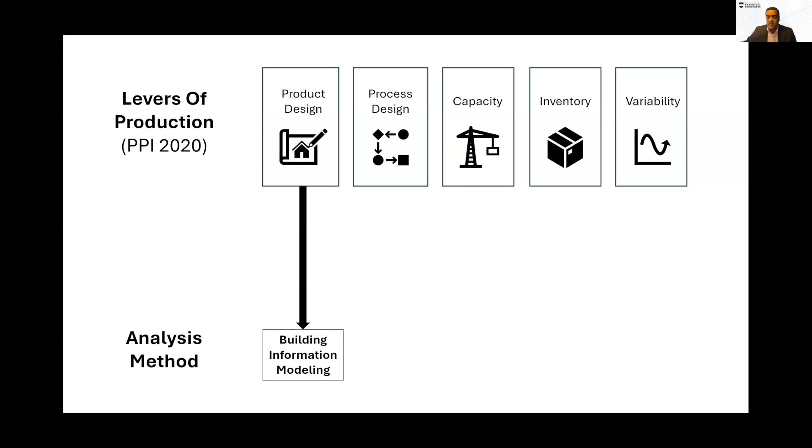All the other levers can somehow be mapped to discrete event simulation, a sophisticated tool from operations science. It can be mapped because discrete event simulation allows you to map processes using activity cycle diagrams, which depict process designs. Capacity and inventory are treated as two different types of resources in these models, and variability can be modeled using probabilistic distributions. So discrete event simulation can really deal with four of these five levers, but it does not work with the product information that comes from product designs. It's this lack of integration that we're trying to tackle with this framework.

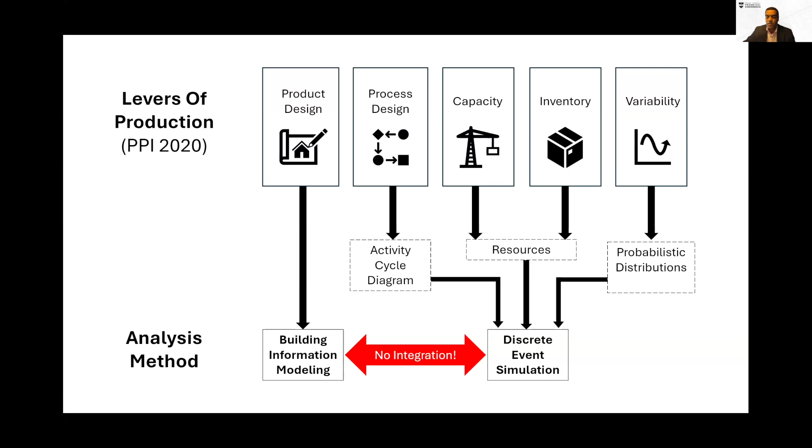I want to spend a slide on discrete event simulation, since most folks are probably familiar with building information modeling, which is more widely adopted in industry. Discrete event simulation is a means of simulating construction processes by considering the activity sequence, resource interdependencies and requirements, and the uncertainties inherent in the system. It enables us to perform a lot of what-if scenario analysis through parameterized simulations. On the right side of my screen is a sample process map being run as a discrete event simulation. You see different activities and resources in these circles or queues, and you can see the inventory flow through the operation.

And at the end of it, we can get statistical results and performance measures of interest like idle times, utilizations, WIP, and so on. And we're using the ConStrobe simulation software, which is developed by myself.

But this was inspired and based on the Stroboscope and EZStrobe system, which I think folks are familiar with in PPI, developed by Dr. Julio Martinez. The advancement that ConStrobe has is that it enables automation through the Python language, which opens up access to a lot of different types of data, which is what I'll be talking about today.

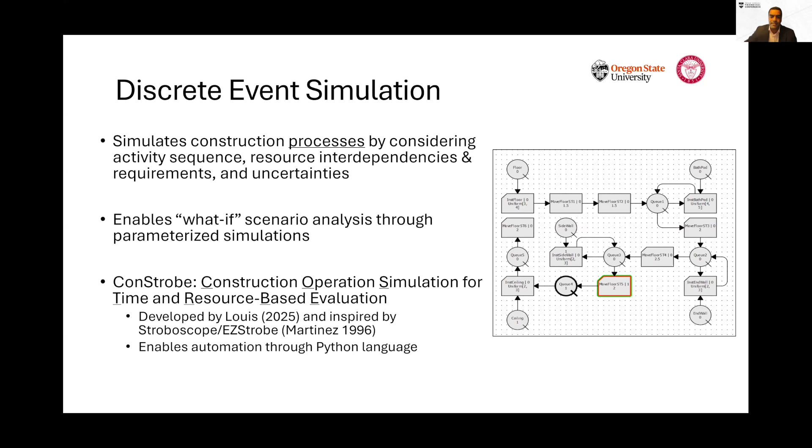So with that background, we can look at both of these modeling methods. We have product modeling on one side with building information models. On the other side, we have processes with discrete event simulation.

And I mentioned the Python language, and that is really what allows us to exchange data between the BIM models from the IFC format. We can query and obtain any type of spatial or product data from there. And on the other hand, we have process data that can also be handled by the Python library.

Now, in addition to this, we're also visualizing the production process itself using a visualization engine. In this case, we're using the Unity game engine.

And here, we're adding one more thing, which is we've programmed resources that are used on projects as smart objects, which have the functionality that you would expect them to have in the real world. So this is the overarching framework.

And what I'd like to do next is to just walk through each of these components through the lens of a case study. So just quickly, the case study is of a Bay Area modular housing project, which was completed in 2017. We just used the plans and the operations from this case study to kind of prove out this framework. It consists of about 416 modules that have been installed in 4 phases.

And what you need to know is that the modules were made in a factory, and then there was a laydown yard very close to the final project site. The modules were transported there, and we had a telescoping crane at the laydown yard to load trucks, which would then move modules to be installed in the main building.

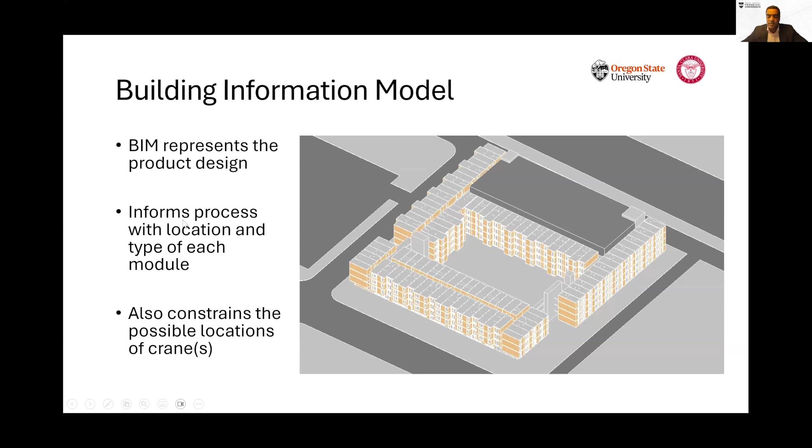Something else that the product design, the BIM model tells us is we can also start to experiment with the order of installation or the order of placement of different modules. This again becomes important if the product is designed such that the crane would need to move to different locations in order to be able to place the module in the correct place. So you can see how the product design can inform the process here as well.

So here we've used a snake path. You can see that we go from left to right for the ground floor, and then we go from right to left again. So this could have an impact on how many times we need to move the crane. On the other hand, we can also test out what it might look like if they all went in one direction.

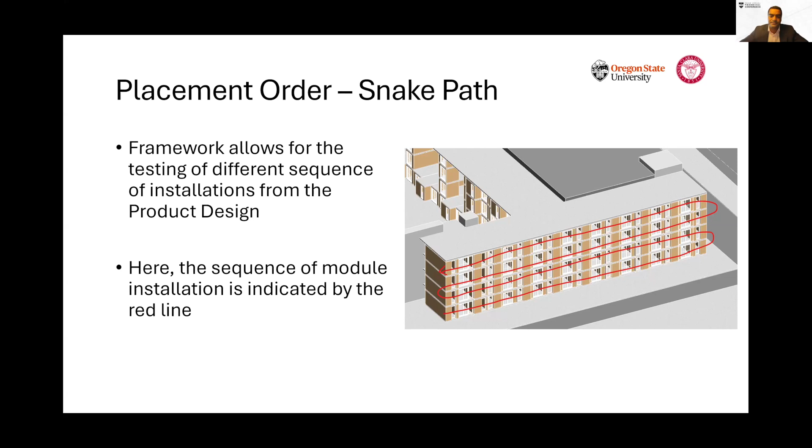Here's the process map of the operation, and I just want to show you how we can get all of the remaining 4 levers in this process model again. So this kind of defines the sequence of activities that needs to happen in order for the inventory, which is the module, to go from factory to its final location in the building, right? So we have various types of capacity here.

So we have space, which denotes the space in the laydown yard, which is 24. We can change that and experiment with that. We have other critical resources like the crane at the laydown yard and the other crane at the project site. We have trucks to transport modules from the laydown yard to the project site. In terms of inventory, we have the modules that move through the system, and you can see that there are queues. The queues are denoted by circles where it could build up depending on the capacity or lack thereof, and variability is shown here through the use of probabilistic distributions, which are obtained in the durations of the various activities.

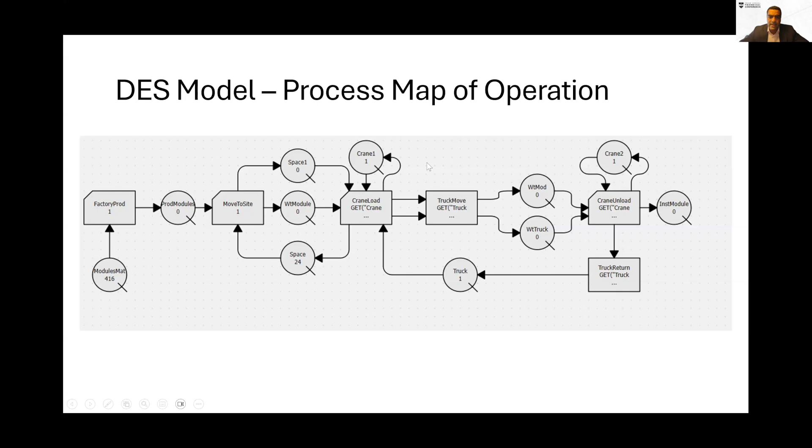Next we have the resources that we've modeled for this project. These resources were modeled in Unity, and the two we modeled are the telescopic crane, as you can see here, and the lattice boom crane. If we just provide the crane with our target pick and place locations, the crane can figure out for itself the required motions according to a rules-based system. It would determine how much it needs to slew, luff its boom, telescope its boom if possible, and how much to move the hoist in order to get it to the correct location. The purpose of doing this is so that we can get more realistic estimates based on the actual physics of the equipment operation for placing modules.

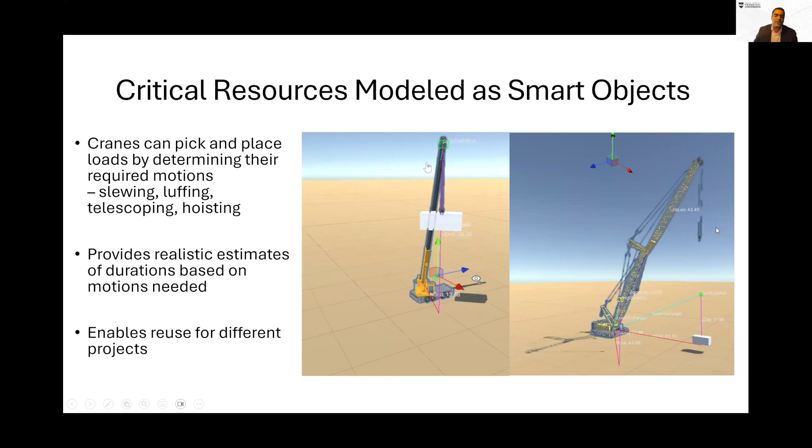Now, of course, we can also build further intelligence into this to make sure that our lift plans avoid collision with other obstacles that might be present on the site. And lastly, because we're using this game engine, we can take this crane and use it for a different project, and it should still work the same, just like how we would do it in the real world. So we've provided these digital objects with the same type of functionality that enables reuse in different projects.

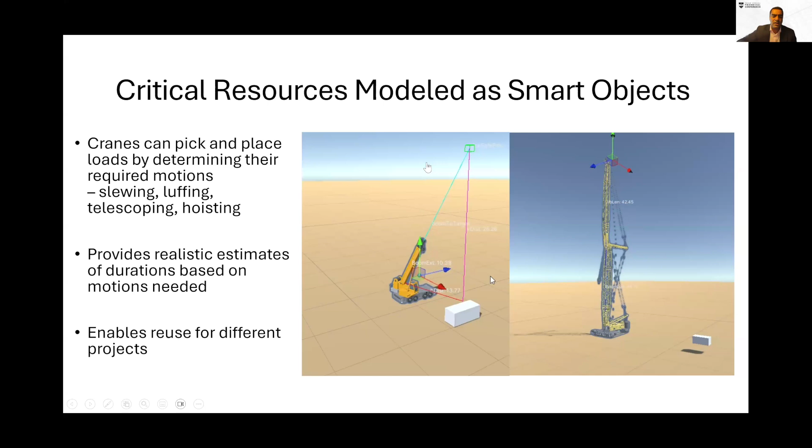So now when we put all of these things together, our BIM model, which represents the product design, our discrete event simulation model, which tells you how resources interact with inventory and constraints, and our resources, we get something that looks like this. It's a complete digital representation of the work that happens on the site, and we can really start to visualize the processes that we expect to happen.

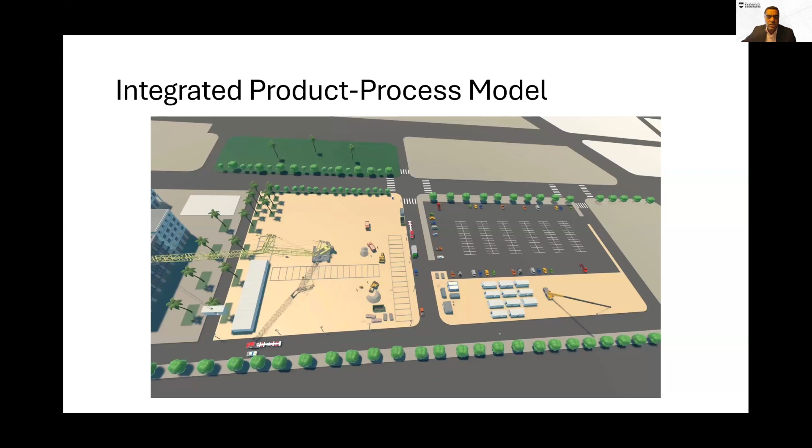One thing that's really useful about this visualization is it allows, first of all, the modeler to understand that they're modeling the operation according to their own understanding. It also allows us to communicate this model and obtain feedback from folks on the ground. They can tell us if we're missing a big constraint that they're seeing on the site that the modeler is not seeing. So it's a great way to communicate potential process plans, potential resource uses and such to the folks on the site and obtain their feedback as well.

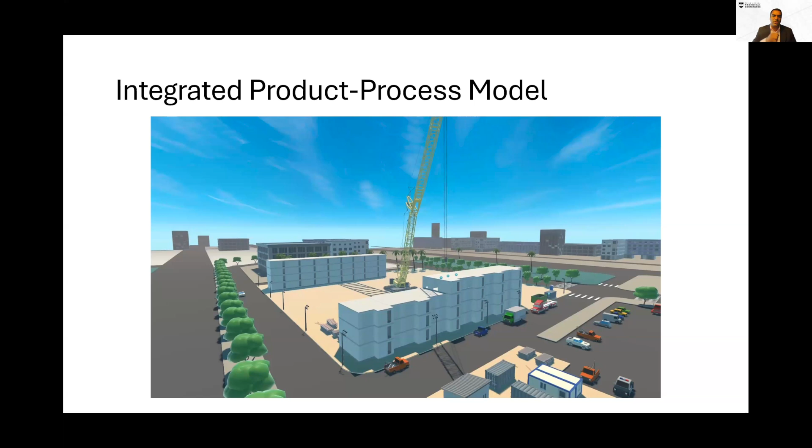All right, so this just shows you another view of it. Let me move on. But having said that, let me also say that the visualization is not the end goal, of course. The end goal is to have the visualization serve as a communication tool and a test bed that allows us to experiment with changing the different levers of production and see how that impacts schedule.

So ultimately, what we want to do is have this system, with the product design and the discrete event simulation, generate the schedule based on the underlying physics of the production system. You can see here we've generated schedules for three different scenarios. If you look at the topmost schedule, we're using a laydown capacity of 24. When we reduce it to a laydown capacity of 12, so we can store 12 modules at a time, we see there's no change in our schedule, which just tells you that the laydown capacity is not a bottleneck at all in this operation. The real bottleneck is the fact that we have only one truck loading one crane.

So when we increase both the trucks and the cranes, we cut the time it takes to construct by half. These are changes we can make, and we can see what these changes might look like on site through the visualization, and then get schedules and metrics as well.

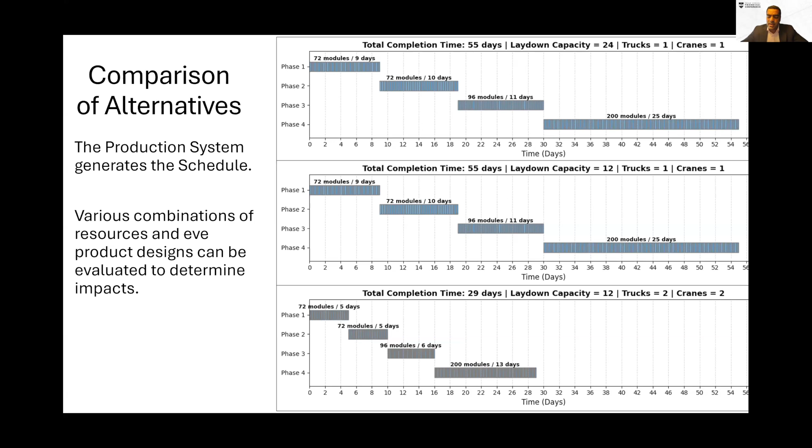I'd like to quickly go over another type of the same analysis. Here, instead of using product information, we're using spatial information from GIS. This is a great way to scale up the operational analysis from one site to more regional sites.

What we're doing here is looking at debris clearance after disasters. In Oregon, we have counties that are very susceptible to landslides, and the question is how much resources do we allocate to different transportation depots based on their susceptibility to landslides. This is the process model, the discrete event simulation model, for debris clearance of landslides.

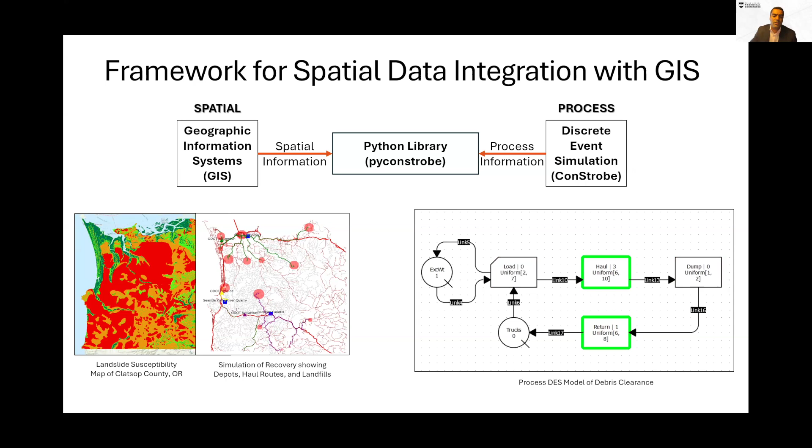If you look at this model, it's a very simplistic model - just excavators loading debris onto trucks, and the trucks hauling the debris, dumping it, and coming back. However, when you scale this up to a region, it's no longer a trivial problem. We need a methodical and analytical way to explore the solution space to see where we might want to allocate resources, so we can start to answer questions for transportation agencies, even for contractors who might have multiple depots and sites, as to how they want to allocate their resources.

Here's a simulation showing how the different colors represent resources from different depots, and how they're being allocated to the different landslides. This would in turn generate the schedule. So just to conclude, these schedules are being generated by the underlying production system, which considers both the process side of things and the product side of things.

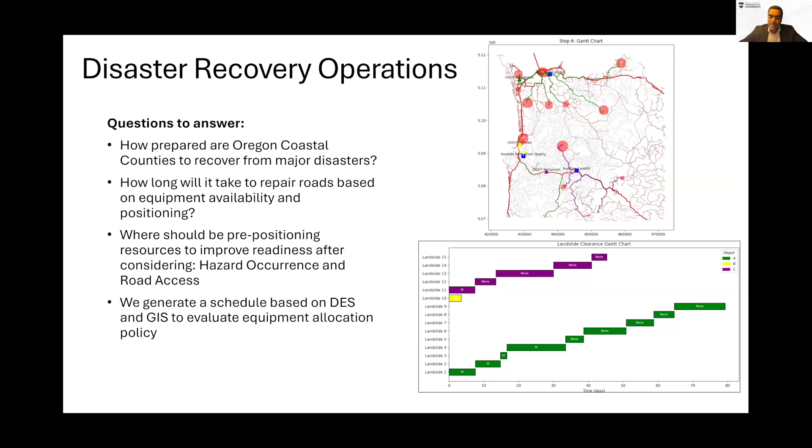So, in my conclusions - what we've done is we've presented this product-process integration framework that enables the analysis of all five production levers simultaneously to generate reliable estimates of performance. This framework is generic and can be applied to any construction operation. I use the word 'any' because all the tools here - discrete event simulation, GIS, and BIM - are applicable very widely, to most construction operations.

The visualization can really help with communication, but that is not the end goal here. The end goal is for it to support evaluation and experimentation with the levers, and really what we want this testbed to be used for is to evaluate different strategies. Ongoing efforts include refining crane model behavior and creating more such smart resources, so that if we can obtain a BIM model of an ongoing project, we can rapidly generate these types of scenarios.

Also, what we want to do with this case study is analyze more levers, more combinations of changing all of these levers and scenarios. We're also looking for other industry case studies where it might be of interest to integrate this analysis, looking at both the product, the spatial analysis, and the discrete event simulation.